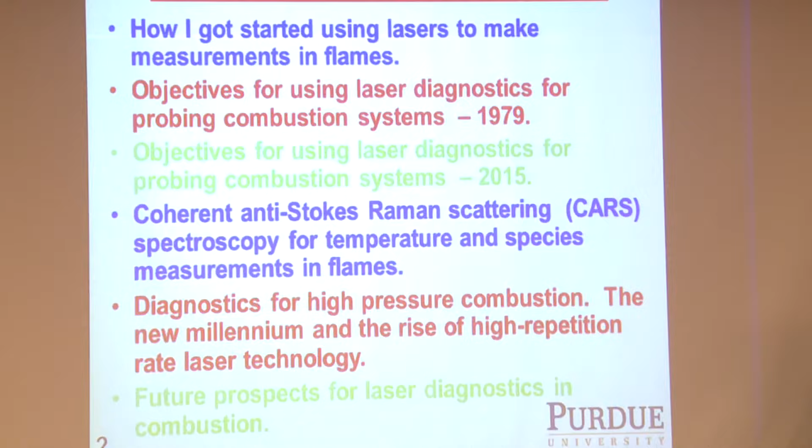So here's the outline of the presentation. I'd like to talk about how I started using lasers for measurements in flames back when I was a graduate student here - I started using lasers for probing combustion systems in 1979. I wanted to compare and contrast what we thought we were doing then with what we think we're doing now, and then talk about two subjects among many.

Femtosecond CARS, which is a diagnostic we're developing - what I call an advanced diagnostic that's not quite ready for application in practical combustion systems. And then I'll talk about some of the things we're doing in systems very close to practical combustion, out at the Zucrow laboratories.

A lot of the things we're doing now have been enabled by the rise of high repetition rate laser technology in the last 10 years especially. And then I'll talk just a little bit, if I have time, about future prospects for laser diagnostics in combustion.

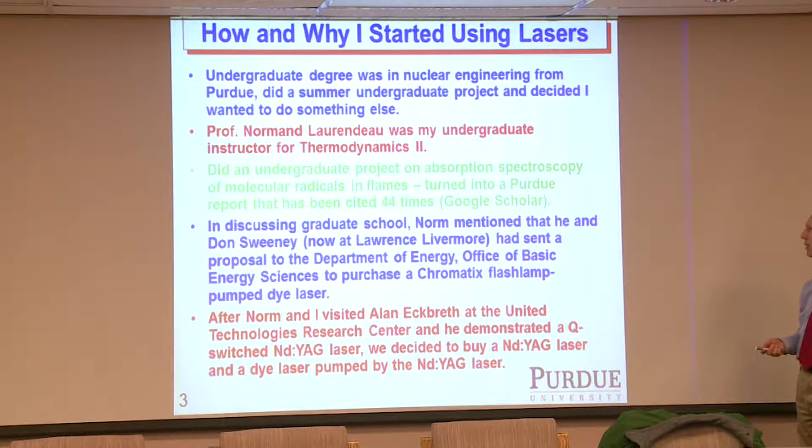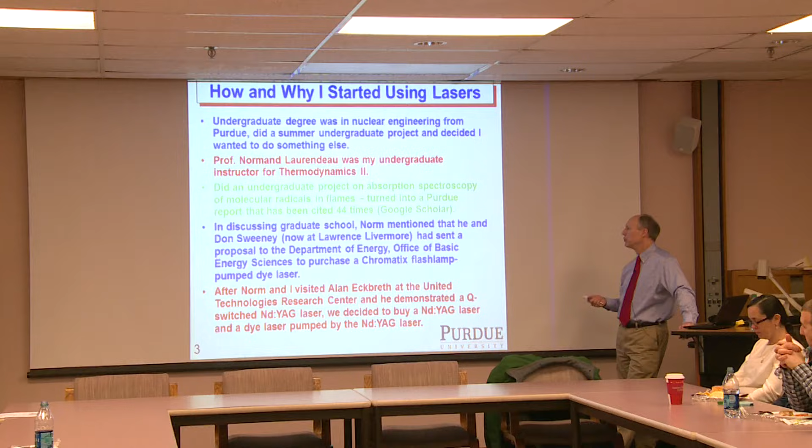So I did an undergraduate project on absorption spectroscopy of molecular radicals in flames, and that's a Purdue report. It's not an archival journal, but that actually got me fairly well known in the combustion community. And it was just at the time when people were starting to think about using lasers to measure properties of flames - temperature, species concentration, and also velocity.

So we were talking about graduate school, and I started working for Norm Laurendeau and Don Sweeney. Norm is deceased - he died a couple of years ago, he got acute leukemia. Don Sweeney is now at Lawrence Livermore. At the time, they were young assistant professors, and they had a proposal into the Department of Energy, Office of Basic Energy Sciences, to buy a laser.

Which was funded. They had proposed to purchase a Chromatix flashlamp-pumped dye laser, which you've probably never heard of because this company went out of business in like 1981. The reason they went out of business was because that was when neodymium YAG lasers and neodymium YAG pumped dye lasers were just coming onto the market.

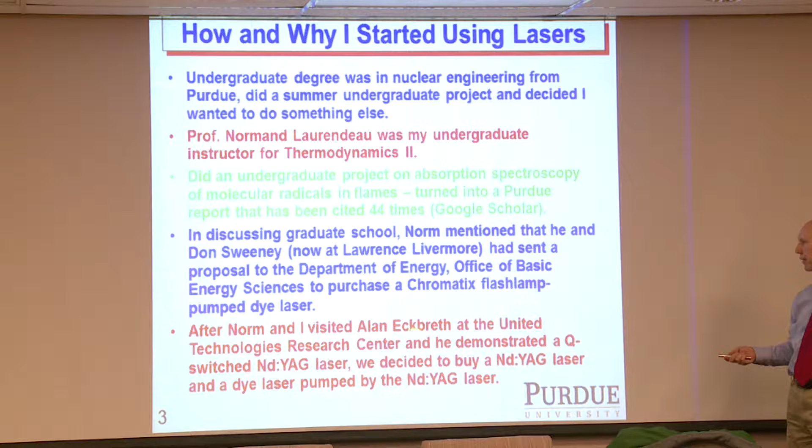So Norm and I went to a meeting at UTRC in East Hartford, Connecticut, and Alan Eckbreth showed us his lab. He'd just gotten one of these Q-switched neodymium YAG lasers, and he held out a lens and demonstrated that you could break down air.

And so Norm decided we needed to buy a YAG laser. He didn't want to get locked into this old technology, and the problem was we only had about half the money, so Norm persuaded the department head, Arthur Lefevre, to give us the rest of the money to buy this neodymium YAG and the dye laser that was pumped by the neodymium YAG laser.

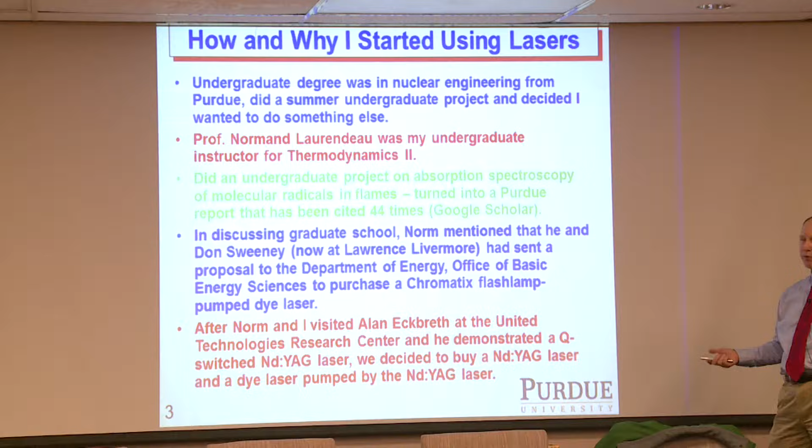And that really set us on a good course because we would have been trapped with obsolete technology just at about the time we had bought the Chromatix laser. So instead we got this new commercial system which kept breaking down, and I kept having to take apart the power supply. It was only when I went to Sandia and took an electrical safety training course that I realized how lucky I had been to survive graduate school.

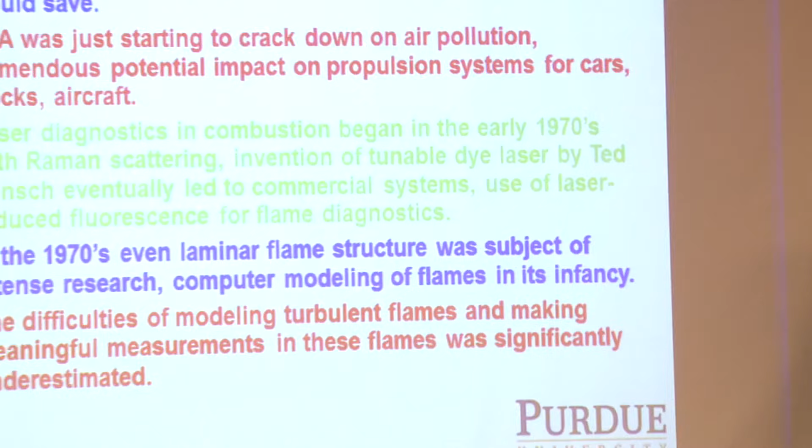So in 1979, there were still a lot of things unknown about combustion, but looking back on it, we've made a tremendous amount of progress over the last however many years that is - over 30 years.

So there was a lot of interest in combustion in 1979 because we had a couple of oil crises. The Department of Energy was new then - it was created by Jimmy Carter, and then it was a campaign target at about this time for Ronald Reagan. But when you sent a proposal into the Department of Energy, you had to indicate how many barrels of oil your proposed research would save.

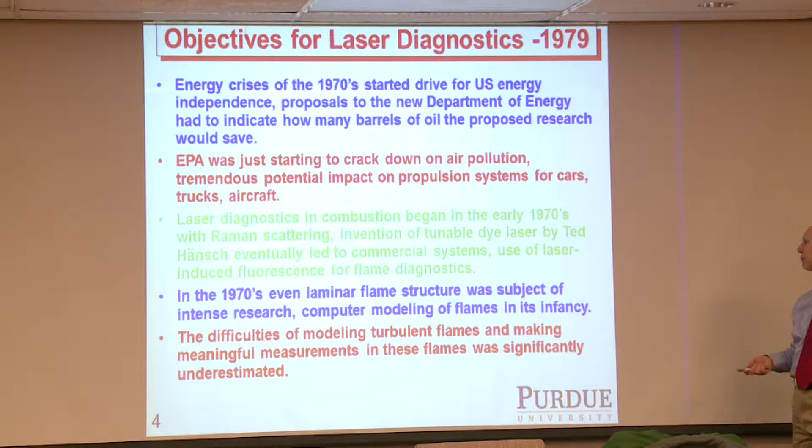So laser diagnostics in combustion began in the early 1970s with Raman scattering - I'll talk about what that is. And then it really got a boost with the invention of the tunable dye laser by Ted Hänsch, who recently got the Nobel Prize for other things, frequency combs and things like that. That led to the use of laser-induced fluorescence for flame diagnostics, which is what I did my PhD on. So in the 1970s, even laminar flame structure was pretty mysterious.

This was before we'd started to use lasers to make measurements in flames, and before people were really using computers to model flames. It's really incredible to look back and see how far we've come.

There were a lot of proposals at that time to go in and make measurements in turbulent flames and figure everything out in 5-10 years or so. It's somewhat like laser fusion in that it's always several years in the future that we're going to figure all these things out.

But we understand a lot more about turbulent combustion than we did back in 1979, and that has had a lot of impact. So now in 2015, we're still very concerned about conserving oil and having efficient combustion systems.

So we have sort of a bridge maybe to renewables because of fracking technology that's developed. We're not worried about running out of natural gas and oil within the next few decades, like 5 years ago everybody predicted that we would be.

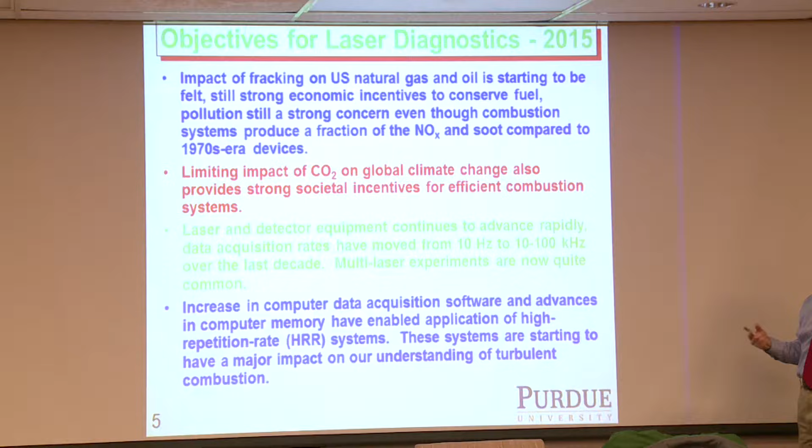But we still kill a lot of people every year, although it's hard to definitely trace it back to air pollution, but we still kill a lot of people because of things like NOx. And soot also is now being implicated in global climate change.

And of course, in combustion, one of the main products of combustion is CO2. So the more efficiently we burn, the less CO2 we produce. So there's still tremendous societal and economic incentives to burn things as efficiently as we can.

Laser and detector equipment continues to advance very rapidly. We were making measurements at 10 hertz for like the first 30 years that I was working in the field, and now we're moving rapidly to 10 to 100 kilohertz systems.

The other thing that we do multi-laser experiments very commonly these days, whereas back when I started, if you could afford to buy a single laser system, you thought you were pretty lucky, and those laser systems had pretty low power.

And so the types of experiments we're doing now, people used to say in papers in the 1970s, if we had another laser system, then we could do these measurements on a single shot. And everybody said, 'Oh, you'll never do that.' But we do that routinely now.

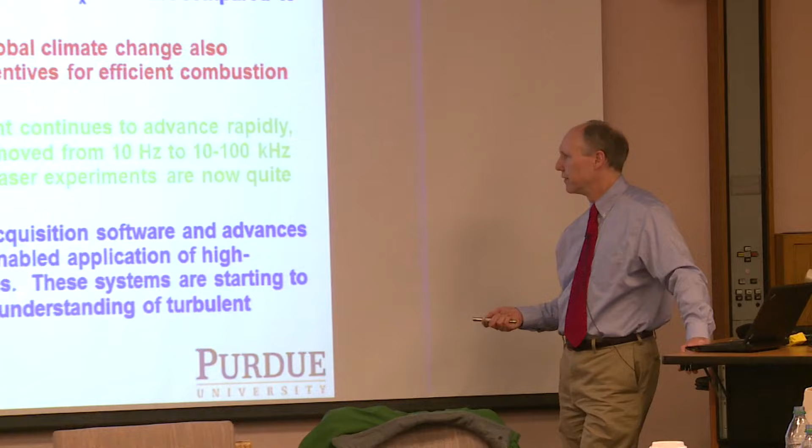The other thing that's really helped our experiments is I took my master's data using a chart recorder, and so now we have computers that allow us to control the experimental systems to take data.

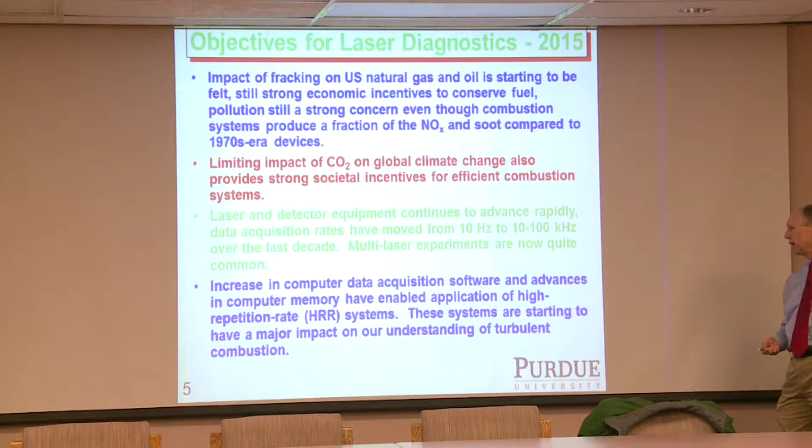Especially out at Zucrow in the combustion lab, we just take a lot of data when we run our gas turbine combustors, pressures and temperatures and everything. And then with these high repetition rate laser systems, a day's worth of data taking results in over a terabyte of data. So it's lucky computer memory has come along and dropped in price so much.

So I thought I'd concentrate on femtosecond CARS, but I thought I'd better say a little bit about what Raman scattering is.

Raman scattering was really developed or discovered experimentally by one of the most famous Indian physicists in history, Raman. He got the Nobel Prize in physics. In Raman scattering, a laser beam at a certain frequency goes in, interacts with the molecule, and the molecule doesn't really absorb the photon, but it scatters it instantaneously, and the molecule goes from a ground state to an excited state if you have Stokes scattering.

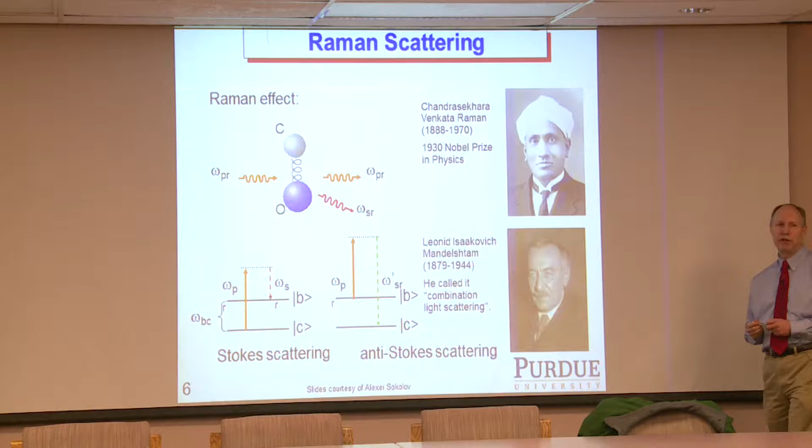And you can see a little bit of light that comes off of the molecule. It's a very weak process, but that light is coming off as a shifted frequency, and the shifted frequency it comes off at depends on the molecule. Because it's instantaneous, the intensity doesn't depend on the collisional environment for the molecule.

So it's a really great technique, and this was the technique that people were looking at. A number of groups, as soon as the invention of the laser came about in the 1960s and 1970s, people started to apply Raman diagnostics in the gas phase.

And people tried to apply it in heavily sooting practical combustion systems, because every flame that was practical in the 1970s was pretty much heavily sooting because of the way the combustion systems were configured.

The problem is that this is an extremely weak process. Rayleigh scattering, which is scattering at the same frequency and is the reason the sky is blue, is thousands of times stronger than Raman scattering. So as soon as people tried to apply this to flames that weren't really clean, that had hydrocarbon fragments or soot, the signal was swamped by interferences.

Alan Eckbreath, who was showing us that laser, was developing CARS at that time. He said if the Raman scattering cross-section was 100 times greater than it is in nature, we wouldn't be dealing with any other sorts of laser diagnostics. But it isn't.

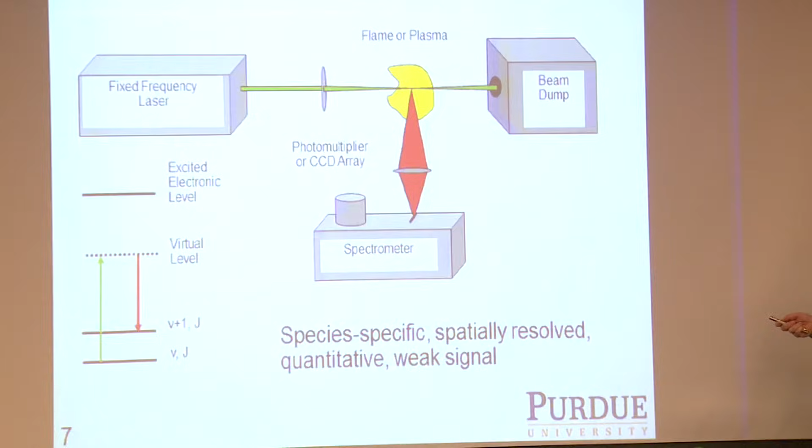So here's a simple diagram for the Raman scattering process, where a laser is focused into a flame, and we collect light from as small a probe volume as we possibly can, because we want to see what's going on at a particular point in the flame. That light is collected, imaged, dispersed with a spectrometer, and detected with a CCD array or a photomultiplier tube.

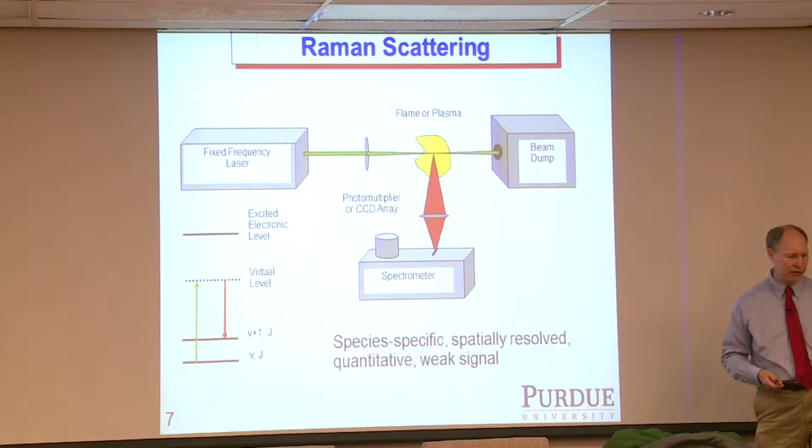The green laser beam goes in, and red light is scattered at the Raman shifted frequency. The frequency of this red light depends on the molecules present in the flow at that point, and the intensity of that light depends on the temperature and density of the flow. So you can get a lot of information if you can detect the signal above the background, and that's the problem. So CARS was developed.

CARS was first demonstrated by Maker and Terhune at Ford Motor Company.

Another difference between research these days and research back in the 1960s was that in the 1960s and 1970s there were a number of industrial labs, like Bell Labs, Ford, GM, General Electric, that had a lot of people, and Bell Labs just did lots of fundamental basic science. They don't do very much of that anymore. Everything is sort of funded by the business units. Andy, you were at Bell Labs, right? A place called Bellcore. Bell Labs split up.

Anyway, they discovered CARS, actually I think in crystals. The name CARS, Coherent Anti-Stokes Raman Scattering, was assigned 10 years later by a group at Stanford University under Bob Byer. It was first used as a gas phase diagnostic by Jean-Pierre Taran at ONERA in France in 1973, who detected hydrogen with it, which is a great Raman scatterer.

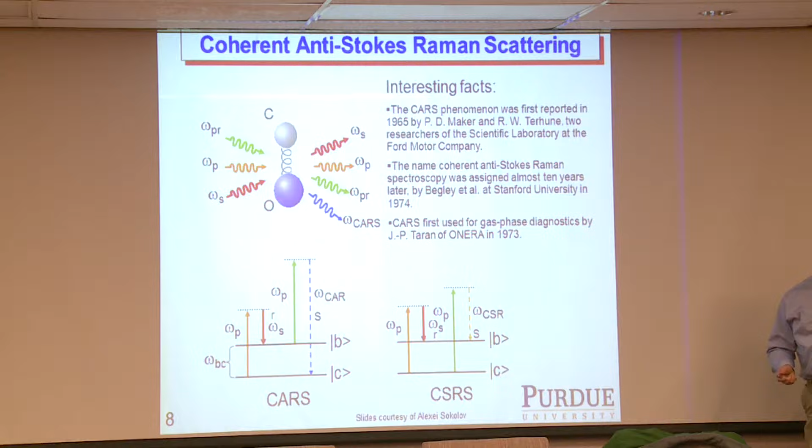In CARS we have a pump beam and a Stokes beam, and three laser beams coming in total. The pump beam and the Stokes beam create a Raman resonance in the medium, and then that resonance scatters the probe beam, with the CARS signal coming off shifted into the blue. The advantage of CARS for combustion diagnostics is that we have three beams coming in and the signal comes out at a different frequency, which is good.

The species selectivity comes in because we only get a significant signal when the pump beam and the Stokes beam are tuned to a Raman resonance of the molecule. In this case, 2,330 wave numbers is the molecular vibration frequency of nitrogen.

Because in this process we have to conserve both photon momentum and photon energy, the signal comes off as a laser beam. So in this process we destroy, in this case, a green photon and a yellow photon, and we create a red photon and a blue photon.

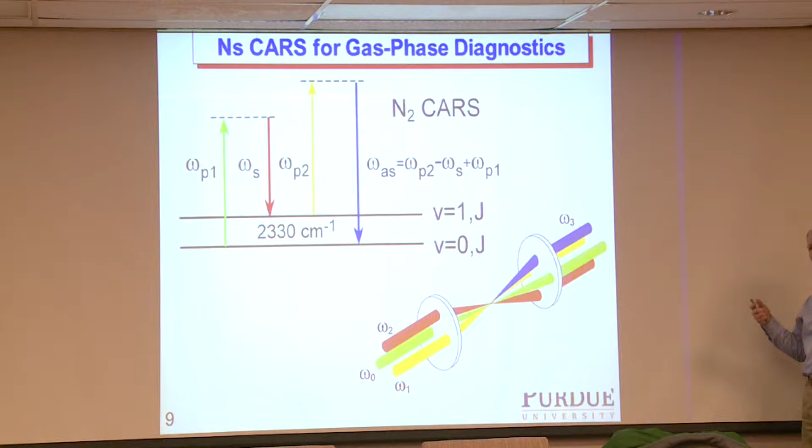I don't have the phase matching diagram here, but you can only get a CARS signal in a particular direction at a particular frequency. That means you can take this signal beam coming out as a laser, focus it into a pinhole, and really discriminate against emission from even very harsh sooting flames.

Now, we want to make these measurements on a single laser shot. The way we do that is we send in three beams. Two of those beams, the pump beam and the probe beam, will have very narrow frequencies, and the third laser beam will be a broadband dye laser.

I'm being very kind to the spectrum here, actually it's incredibly noisy spectrally. In that case, we can detect all of the transitions of the nitrogen molecule at once.

This is the fundamental vibrational band, and the little lines you see here are the rotational transitions under that vibrational band. This is what the spectrum looks like at 500 Kelvin, and this is what it looks like at 2000 Kelvin. So from the shape of the spectrum, we can determine the temperature in the flow at the point where the beams have crossed.

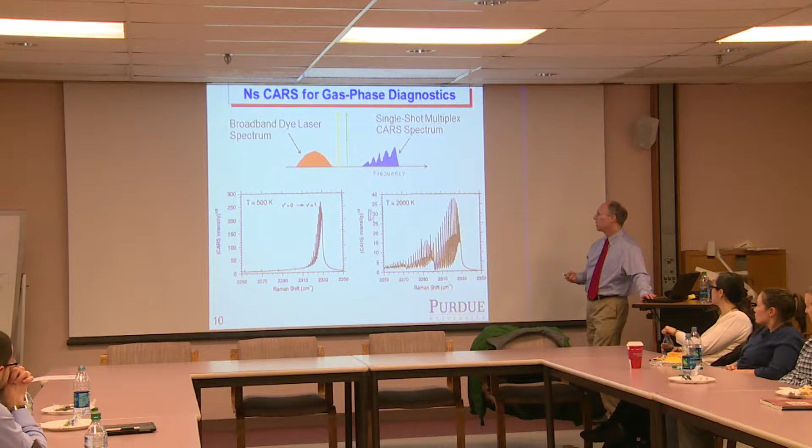We only get the CARS signal when the beams cross, and so that gives us a spatially resolved measurement. Also, because the beams are 10 nanoseconds, we get time resolution. So this is what a CARS experiment looks like.

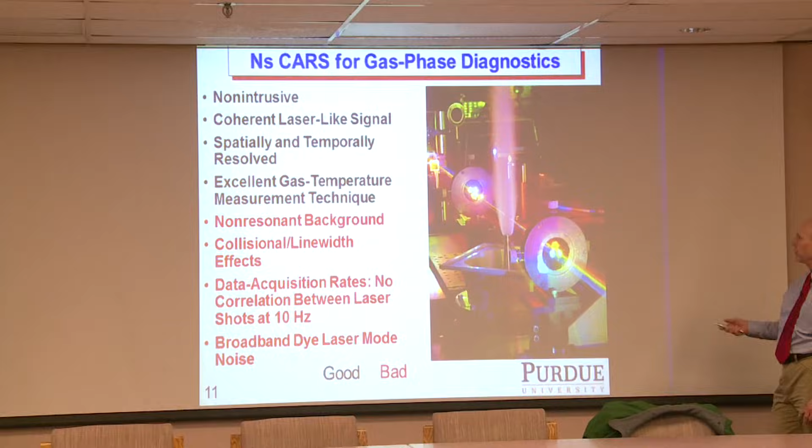This is a flame system we still have set up in our laboratory, a hydrogen jet diffusion flame. It's a simple laboratory flame, or fairly simple as turbulent flames get, that we use to test our diagnostic techniques. What I show here is a technique we call triple pump CARS. We have 4 laser beams focused to a point, and then the signal comes off. Unfortunately, you can't see the signal because it's at such low intensity, at least for nanosecond CARS. For femtosecond CARS, we can actually see it.

CARS is an excellent temperature measurement technique. It's non-intrusive - that was a word in the title slide. That means the laser beam is going through, and it doesn't really affect the flame like if you put a physical probe, like a thermocouple, in there. If you put a thermocouple in there, the gas molecules would have to flow around it. So the laser does not perturb the flame.

The signal comes out as a laser beam in CARS, with spatial and temporal resolution. So CARS is the best temperature measurement technique we have in combustion, the most widely applied, although it's complicated physically, so there are not that many groups in the world that actually do it.

There are a number of problems in applying the technique: non-resonant background, collisional line width. The one I'll talk about is that these laser systems operate at 10 hertz, so there's no correlation between the laser shots in a turbulent flame. By the time you have another laser shot, the flame has changed completely. And the broadband dye laser gives you a tremendous amount of noise on the signal.

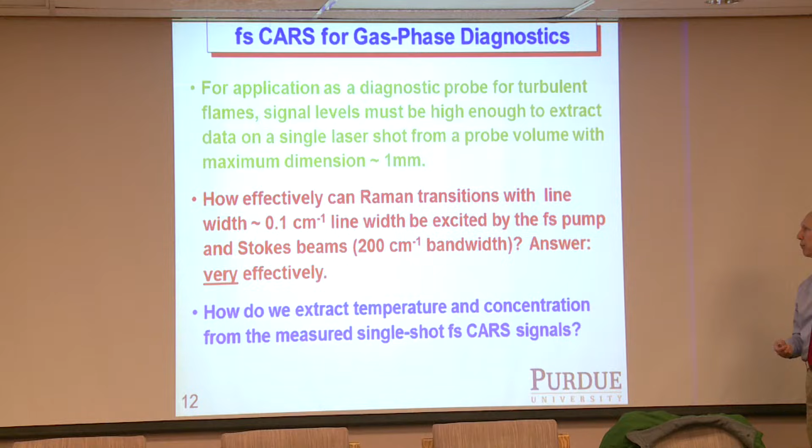So to address a lot of those problems, I thought about trying to use femtosecond lasers in the early 2000s. I was at a Gordon conference listening to a talk by a physical chemist from Heidelberg, I think. He had been using CARS to make time-averaged measurements of flame temperature, which wasn't that interesting to me because you really wanted to make single shot measurements in flames to get at turbulent statistics and things like that.

So I figured you'd never really be able to apply ultrafast lasers to do CARS in flames because the spectrum of an ultrafast laser is just so big. An ultrafast laser system with a, say, 100 femtosecond pulse width is 200 wave numbers wide. Our Raman transitions are, at atmospheric pressure, about 0.1 wave numbers wide. So I was half listening to this person, and then I realized that the Raman transition is a two-photon process, and so actually we can excite Raman transitions extremely effectively with these ultrafast laser systems.

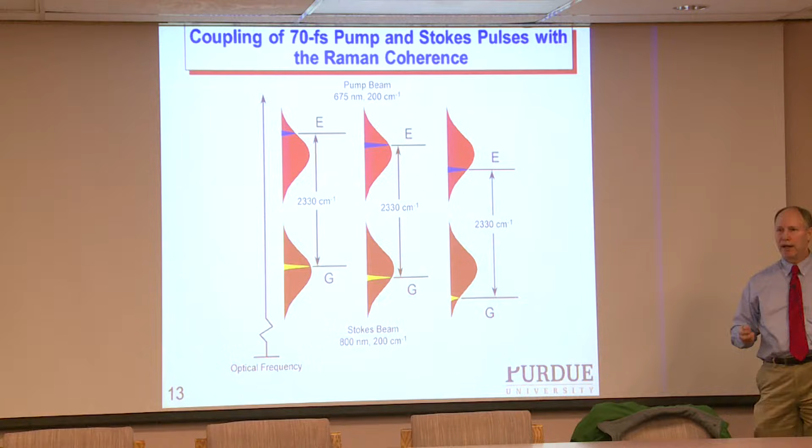Then the question is how we can extract temperature and concentration. I won't go into all of that, but here's why we can couple very efficiently with even very narrow resonances. Say we have a resonant line at 2,330 wave numbers that's very narrow - we can pick out a frequency pair here, our Stokes beam and our pump beam for the ultrafast laser system, and use that to excite the transition. But there's another frequency pair that can excite it here, and another here. So basically the entire bandwidth of the ultrafast laser system can be used to excite a single transition very efficiently, and all these frequency pairs contribute coherently to that excitation because the ultrafast laser is actually a single mode laser and has the same phase across that spectrum.

And so the other thing we had to do was determine how we could actually make single shot measurements.

This is a theoretical calculation. We can create a giant Raman coherence in the medium at t=0 by the interaction of ultrafast pump and Stokes beams. Not only do they excite single transitions very effectively, they excite all of the transitions we're interested in with the same efficiency, pretty much, for a molecule like nitrogen. So at time 0, we get a giant Raman coherence in the medium.

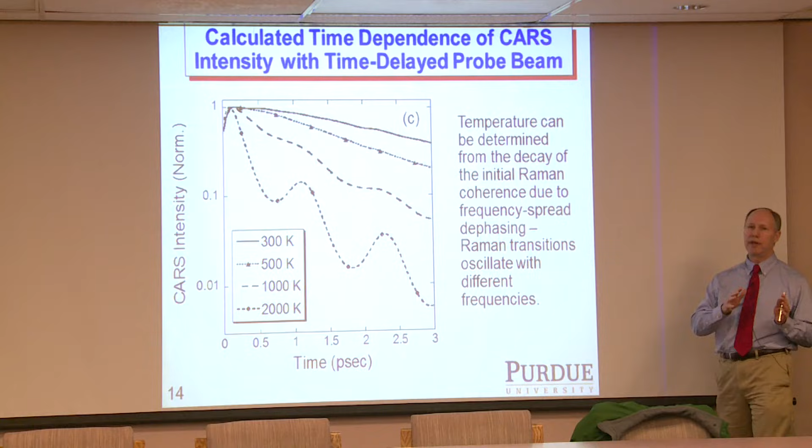That Raman coherence then decays, not because the molecules are colliding, but within a few picoseconds. The collisional frequencies in a flame are about 100 picoseconds or so. It decays because all of those Raman transitions, excited by the ultrafast pump and Stokes pulse, initially have the same phase, but then they start to oscillate with their transition resonant frequencies, and those frequencies are all a little bit different, so they start to oscillate out of phase.

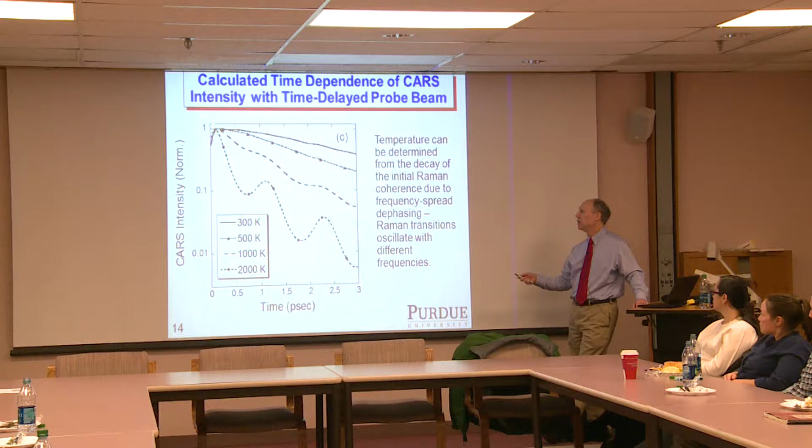At low temperature, they pretty much all have the same frequency, so it takes a long time for them to oscillate out of phase and for the coherence to decay. At high temperature, though, we have a very large frequency spread of transitions, so they decay very rapidly. Here you can see some beating coming in because we're exciting more than one vibrational mode of the molecule in this case.

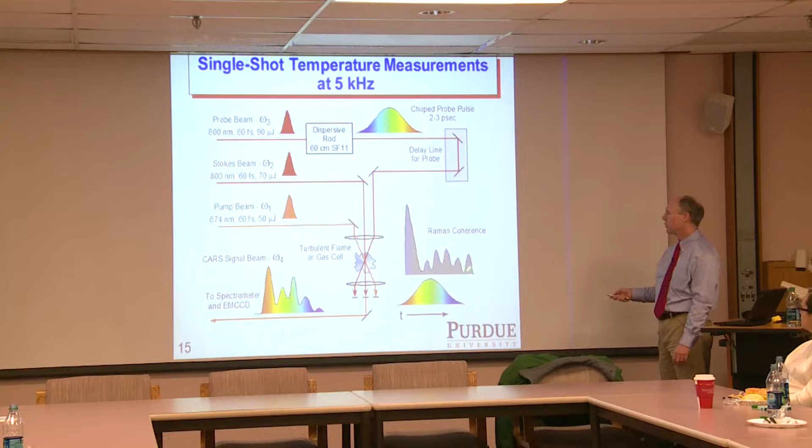I could say a lot more about that, but the other thing we had to figure out was how to map the decay of that Raman coherence into the spectrum of the CARS signal beam. We do that by sending the probe beam through a rod. We have this nice 60 femtosecond laser beam that we've spent over $500,000 on the technology to produce this pulse at 60 femtoseconds.

Then we send it through this rod of glass and disperse those frequencies so that the red frequencies come out first and the blue frequencies come out last. The Stokes beam and the pump beam are nearly Fourier transform limited, so we cross those in the flame. Then we probe the Raman coherence with this chirped probe pulse, and we map the decay of the coherence into the spectrum of our CARS signal beam.

The nice thing about femtosecond CARS is that if we take data in a very stable flame, we can get a very, very narrow instrument function. In a turbulent flame, we have vast fluctuations in temperature, so in the pseudo-laminar flame we were developing the technique in, we're measuring pretty much always the same temperature, 1592 plus or minus 10 Kelvin in this case.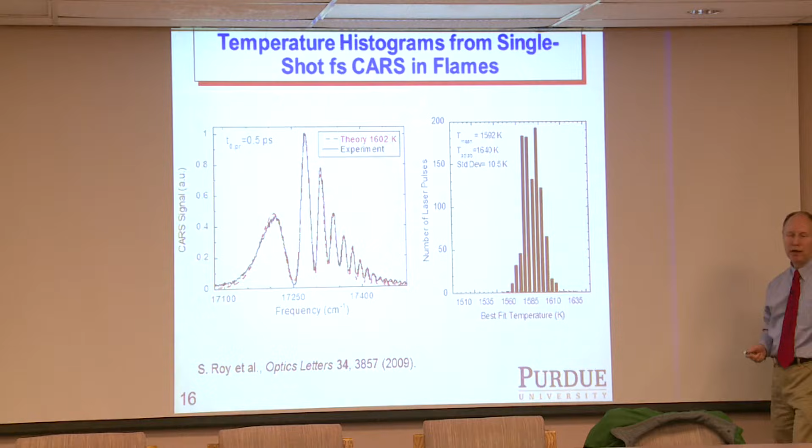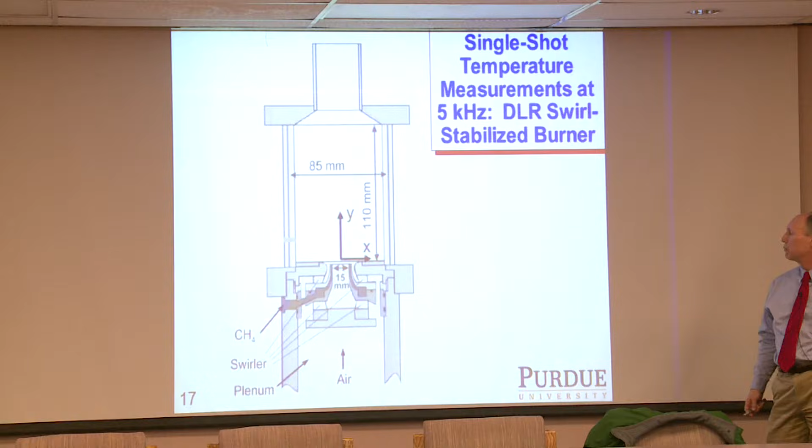We had been developing this technique for quite a few years, so we decided to try some measurements with researchers from DLR Stuttgart in a swirl stabilized burner. Claresta Dennis and Carson Slabaugh are in the audience here. So this is the burner in operation.

You can hear it a little bit here. You can barely hear yourself think in the lab when this flame is on. In fact, one day I'd forgotten my key card for the lab, and I tried to get in, but they couldn't hear me.

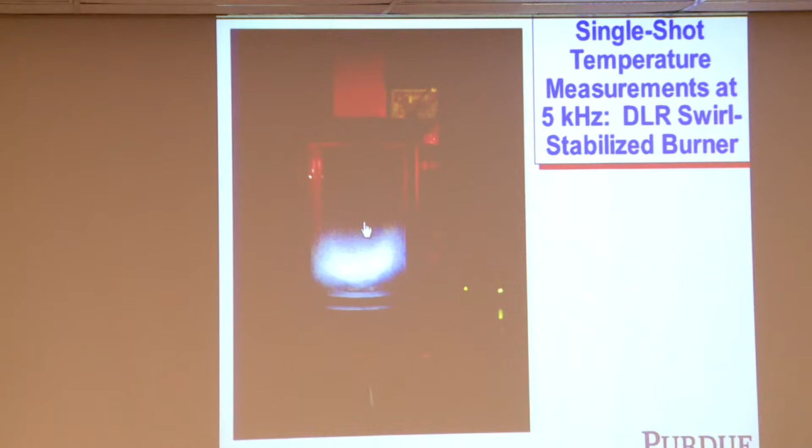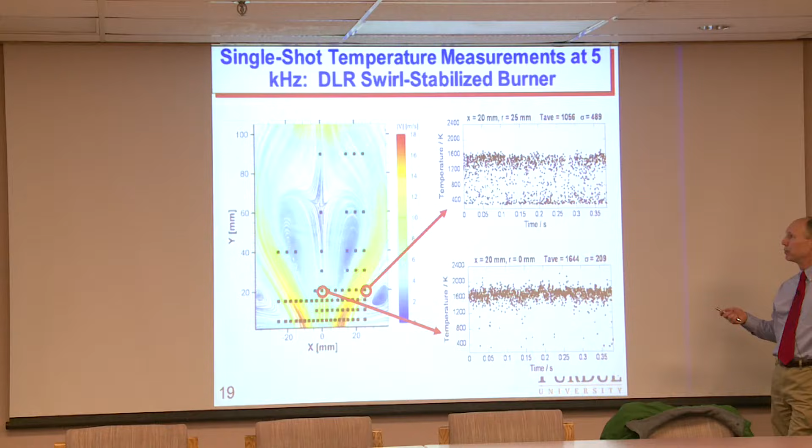Despite the very, very high levels of turbulence in that burner, we were able to make temperature measurements on almost every laser shot.

Here's a velocity field diagram of that flame. Here we have a recirculation zone point where we expect the temperature to be pretty much stable, and that's what we observe. Then here we are in the shear layer where the fuel and air are mixing, so we have the shear layer moving back and forth with lots of turbulent interaction going on, and there we see a much greater spread of temperature measurements.

We're continuing to work on this technique, and eventually we'll want to apply it in high pressure turbulent combustion.

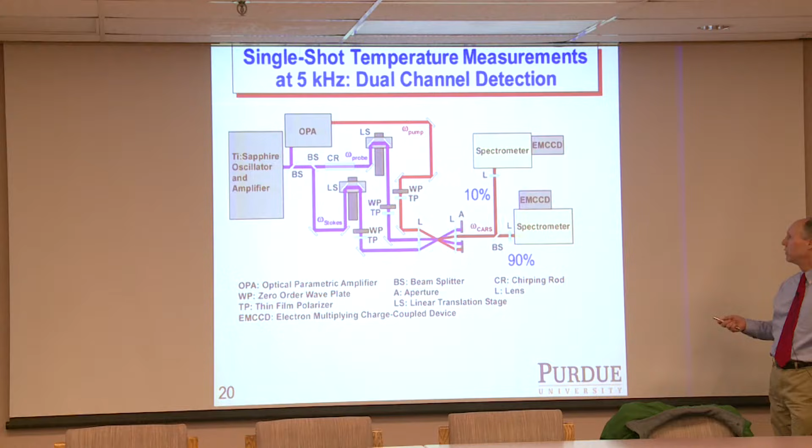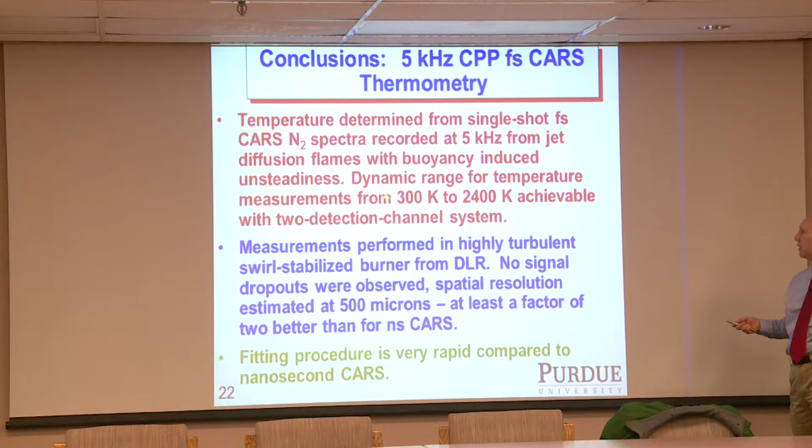We've done things like use a dual detection system to increase the dynamic range, so I'll skip over that. But we're able to make measurements at 5 kilohertz in these turbulent flames. One of the challenges we face is that the temperature in the flame can go from 300 K to 2400 K, and the signal level drops by a factor of 1,000 when that happens.

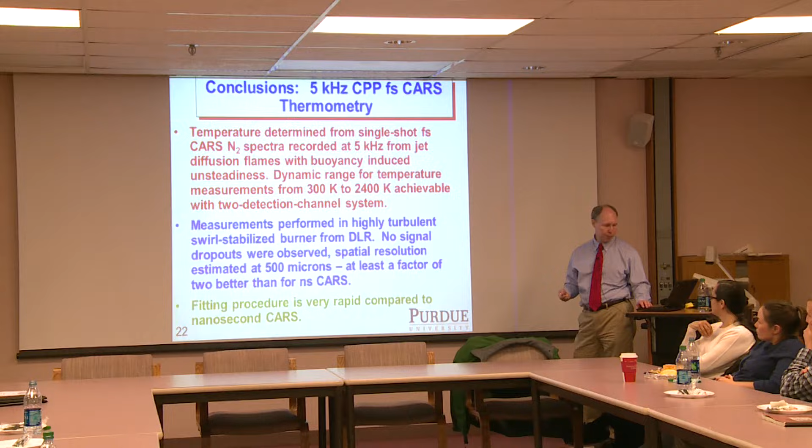The measurements were performed in this highly turbulent swirl stabilized flame from DLR Stuttgart. They wanted to learn how to use femtosecond CARS, and we wanted to learn how to do high speed particle image velocimetry. So that's what I'll turn to now.

I'll talk about our measurements in high pressure combustors. These are measurements we're making out of the Zucrow laboratory. Eventually we want to apply things like femtosecond CARS in these systems, but I'll talk about the measurements we're making now. In particular, I'll be concentrating on the aviation gas turbine testing or experiments that we're doing.

Why do we want to make measurements in high pressure combustion systems? We're trying to help the gas turbine industry in this country. These systems are very complex. The combustion changes considerably as the pressure increases, so you can't do atmospheric pressure measurements and figure out what's going on in these high pressure systems.

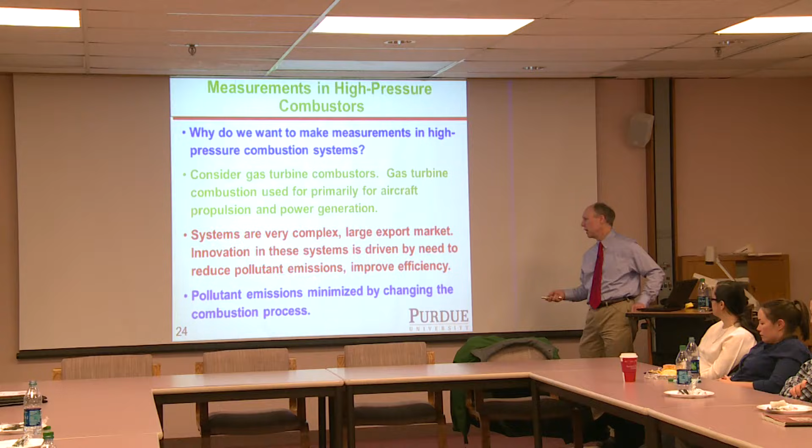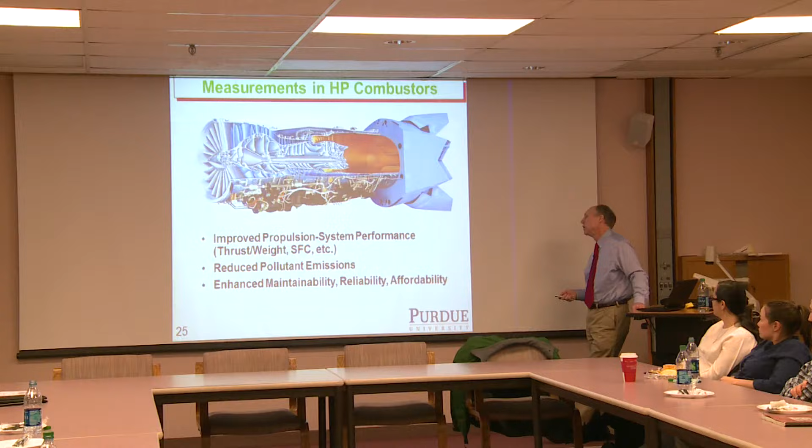Gas turbines are still something the US makes that the rest of the world wants to buy. A lot of the research in at least civil aviation is directed at trying to get very low pollutant emissions. This is actually a military gas turbine, the engine for the F-22, and so the combustor is right here.

It's kind of hard to see. The volume that the combustor actually occupies for the whole engine is surprisingly small, but there's tremendous energy release in that combustion zone due to the very high turbulence levels, and that's what keeps the airplanes in the air. All of this is the compressor, and then there's a little bit of a turbine here in this aircraft engine.

And then here is the afterburner. So for not so much for military, but for aviation gas turbines, what we want to do is minimize the amount of pollution that we produce from burning the fuel in the air here.

The compressor produces high pressure air that's heated to a very high temperature also. The fuel is sprayed in, and it used to be that the fuel was sprayed in with a nozzle that would mix the fuel very far from the nozzle. So there would be lots of regions where you would have too much fuel for all the air to burn, and that would produce a lot of smoke and nitric oxide.

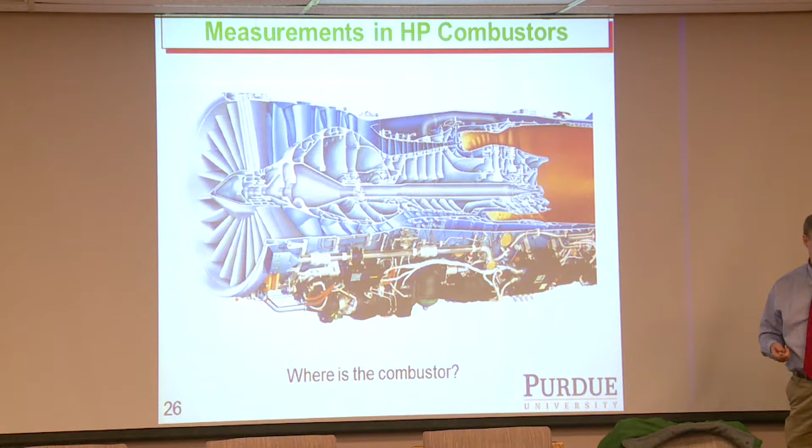Now the approach is to try to burn as lean as you possibly can, to try to premix the fuel and air before the combustion process starts. That way you avoid creating soot because you don't have too much fuel for the air to burn. You also decrease the nitric oxide because it doesn't really form if you can keep the temperature below 1800 Kelvin or so.

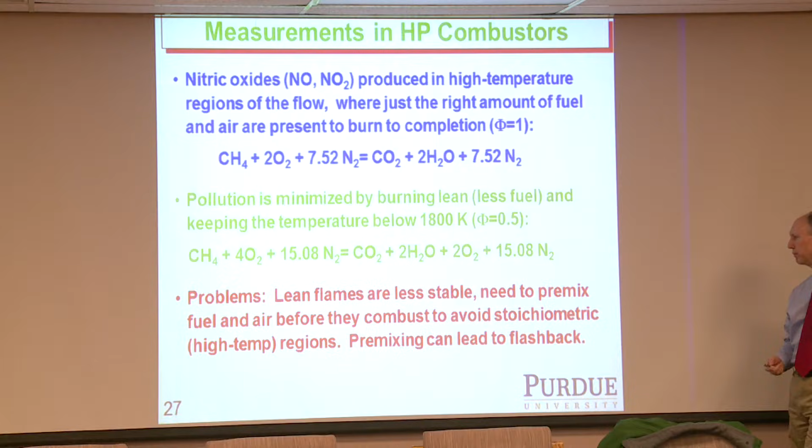Now the problem is, as you try to burn leaner and leaner, the flame becomes less stable. You have combustion instabilities, and you have to be very careful about how you do it, because if you just premix the fuel and air, it would flash back and start burning up your aviation hardware.

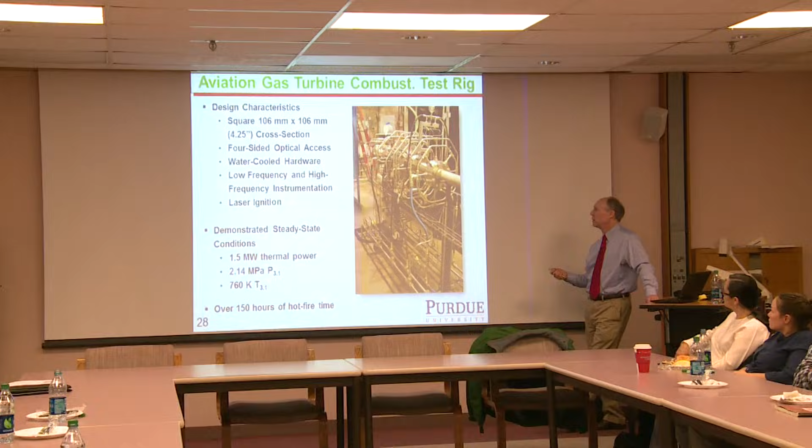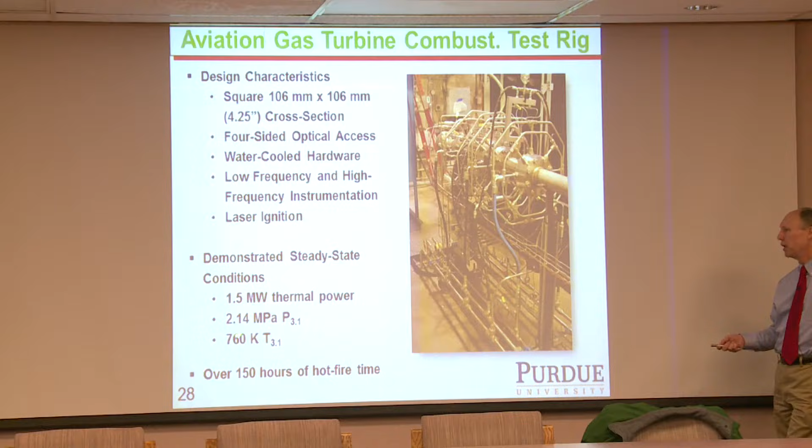So we have an aviation gas turbine combustion test rig that we've been developing out at Zucrow. It really started under 21st Century funding and then NASA funding. About 4 years ago, General Electric Aviation started to fund us to look at their advanced lean premix pre-vaporized injector, which we're not supposed to say the name of. This is a test rig that Carson Slabaugh and others have been working on, and we've demonstrated operation at 1.5 megawatts of thermal energy release in about a liter volume, at pressures above 20 bars and with inlet temperatures up to 760 Kelvin. That'll be going up in the near future.

So this is a video of...

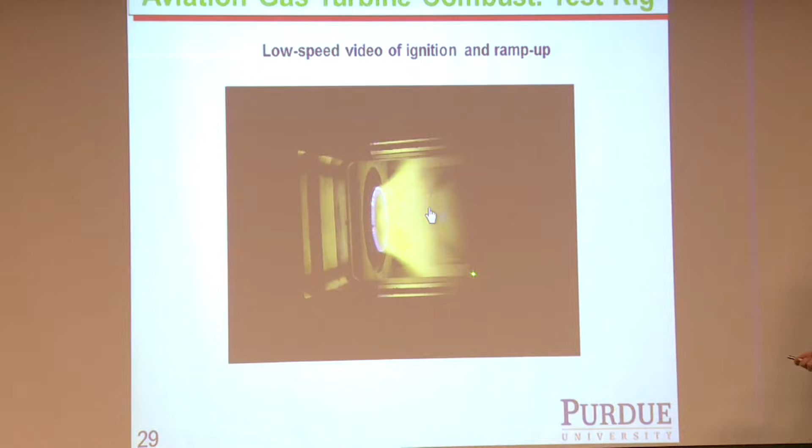We use a laser to ignite the flame—that's the little flashing you saw there. The reason we do that is we use a lot of nitrogen to film cool the windows. It used to be that we had a spark plug in one of the windows, which we replaced with metal. We had to flow a lot of fuel to get the stoichiometric mixture right at that spark plug, and we also had to turn the nitrogen off. So once the flame was ignited, it was a panic to get it turned down before we burned up the test rig. Laser ignition really helps us in terms of rig safety.

So I'll show that one more time. The flow is coming in—this is the main flow, and there's actually no fuel coming in the main. This is called a heat shield, that's what's turning purple and heating up. So this is all pilot fuel at the moment, and it's a very, very clean burning flame—you don't see a lot of soot there. It looks very blue in the laboratory because it's being premixed and leaned out before the combustion starts, so we don't produce soot that coats the windows at all in this burner.

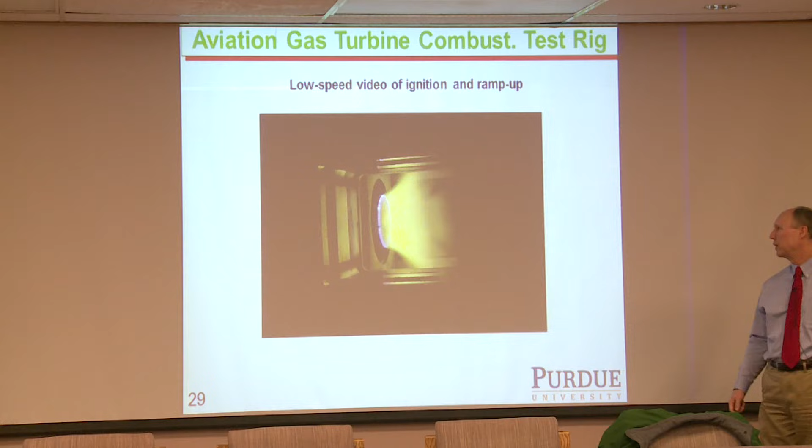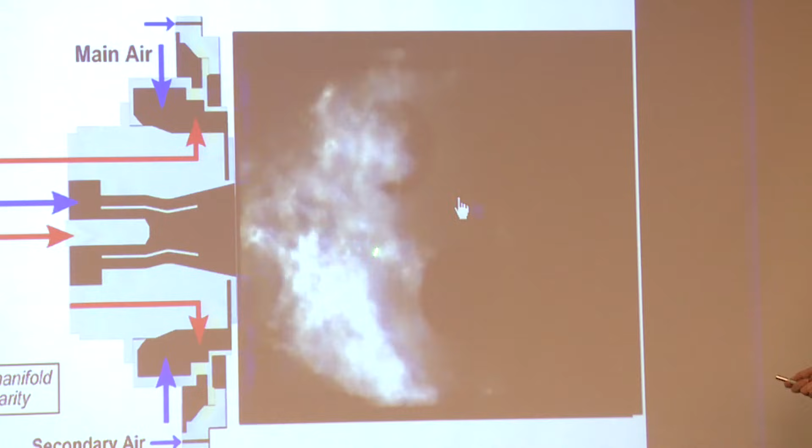That was a low-speed video, which surprisingly the people at GE really like to look at—that was just a GoPro video. This next one is a video produced of the combustion zone by a high-speed camera operating at 5 kilohertz. The flame looks really steady with the GoPro camera, but actually there are a tremendous amount of dynamics going on. In particular, the flow is coming in and recirculating back, the fuel is coming in, recirculating back and burning in what's called the recirculation bubble. That's what we're most interested in looking at for General Electric.

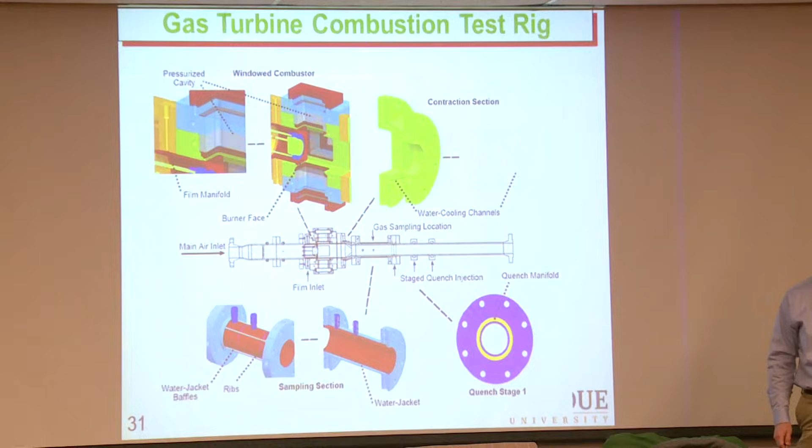So this is a little bit on the design. Carson Slabaugh was the principal person working on the design here, and Scott Meyer, who's also here, was also involved in that early process where we spent about 6 months talking about this design with GE. One of the reasons our windows survive so well is we use high pressure nitrogen to flow over the window—we have a lot of nitrogen out at Zucrow, and that was an idea Carson had. So we get a nice film cooling of that window, and it survives even though a lot of times we think the flame is impacting actually right on the window.

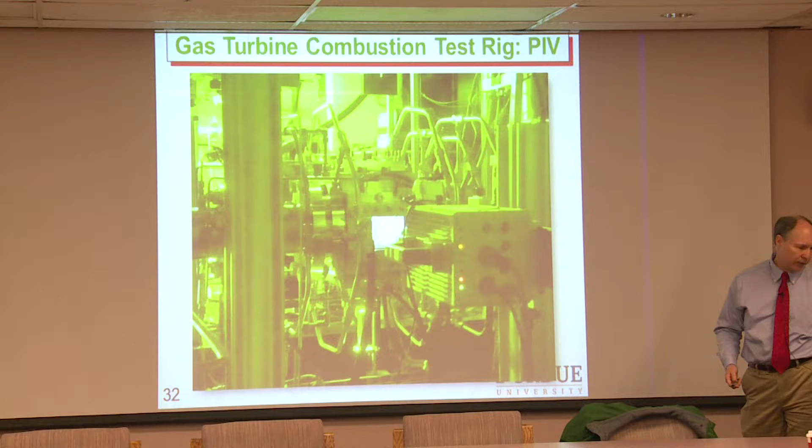Here's a photograph of the system in operation, and it looks completely green here because we're using a green laser to do particle imaging velocimetry in the system. The green laser we're using is called the PIV laser—it's a dual head system that puts out a beam at 532 nanometers in the green, and it really gives us some spectacular pictures.

The way we operate is we form a laser sheet. The beam comes out, and we use cylindrical lenses to focus it in one dimension and spread it out and collimate it in another dimension. So we get a sheet of light coming through the chamber, and the PIV laser puts out two laser pulses that are very close in time. We seed titanium dioxide particles into the flow, then look at the scattering with the PIV camera from those particles, and see how they move from one image to the next. From that, we're able to determine the velocity in the flow.

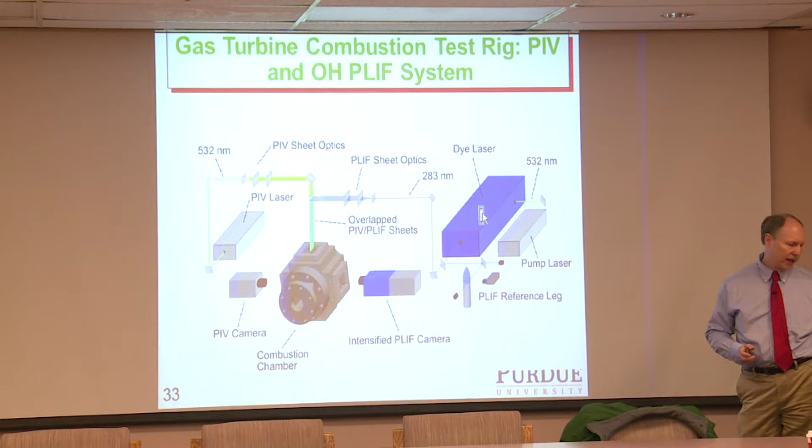We also use another laser, and this one doesn't give us very good pictures at all because it's a 283 nanometer beam that we can't see. But this beam is tuned to a resonance of the OH molecule, and that tells us where the flame is burning. So from the PIV measurements, we seed particles in and take two very rapid snapshots, which tells us what the flow velocity is in this plane. Then the PLIF sheet is overlapped, and that tells us where the flame is burning in this sheet.

We're trying to look at the influence of the velocity field on the reaction fronts. So here is scattering from those particles—this is a PIV image when we don't have any liquid fuel injection. We take two of these images like this, spaced by about 8 microseconds or so, depending on what we think the flow velocity is.

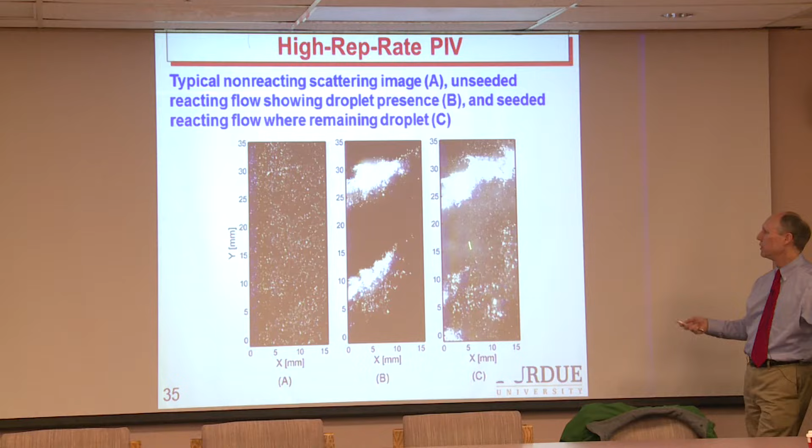And then we can track the particles using sophisticated algorithms and determine what the velocity is at a point in the flow. In these high-pressure liquid-fueled systems, we have a lot of fuel droplets coming in. So this is a picture with no PIV seed, and here's a picture with the droplets and the PIV seed. We have to figure out how to discriminate against the liquid droplets, or maybe use that information.

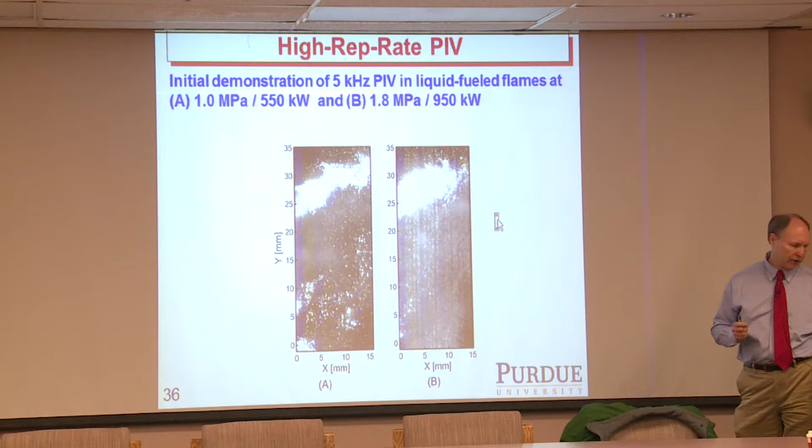The other thing that happens as we go to higher and higher pressure and thermal heat release is we start to get blurring in the images. So we're fighting a lot of those issues as we go to higher and higher pressure, but we've learned how to deal with a number of them.

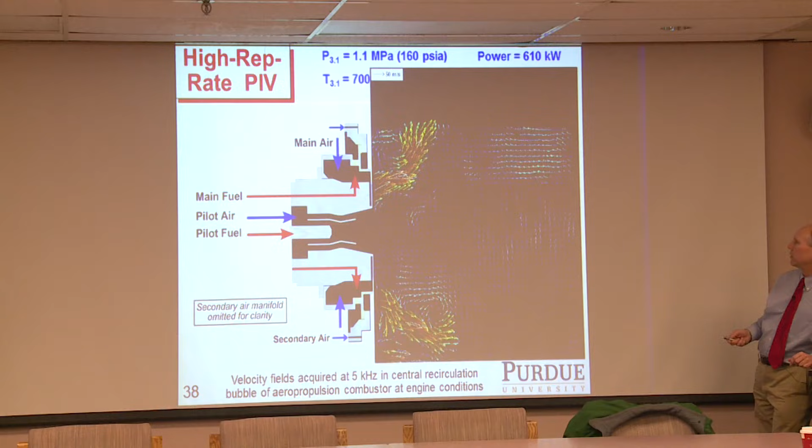So we have a wide dynamic range of velocities in this flow that we have to be able to handle with our particle imaging velocimetry measurements. If you saw that, you could see a significant vortical structure - the flow has some vortical structure in here. We see a lot of interesting things looking at these measurements.

So we combine that with the OH-PLIF. All of these measurements are made possible by the introduction of diode-pumped solid-state lasers, commercially available for a little less than a decade now.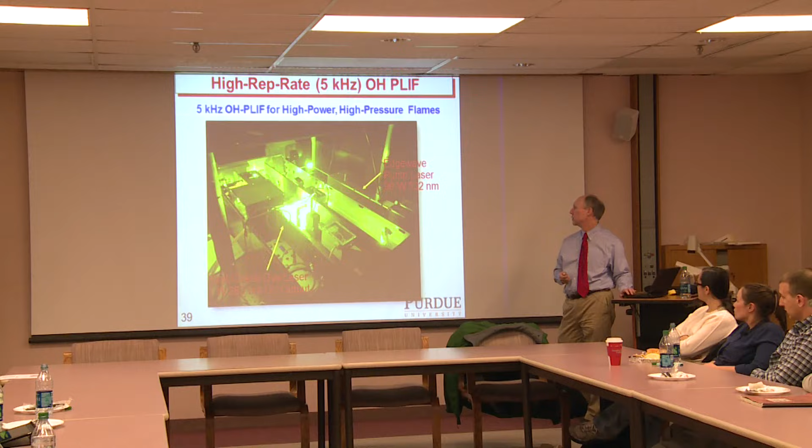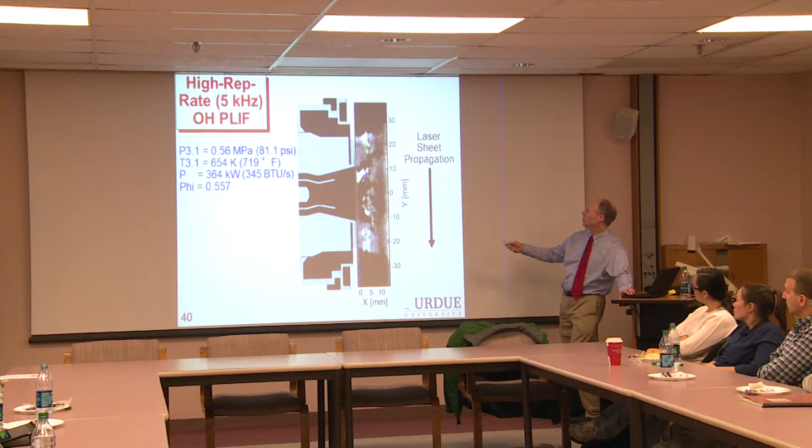So we do the same thing with the OH-PLIF. Here's a laser sheet coming in, and here it's a grayscale image, so the high intensity regions are where we have a lot of OH. You can see here we don't have reaction, and here we have reaction. This is the pilot region, and here we have a region where the pilot and the main are reacting, are interacting. Then here we have the heat shield region, which is a region of interest where we're getting reactants right on that heat shield - I'll just skip over how we process the images here.

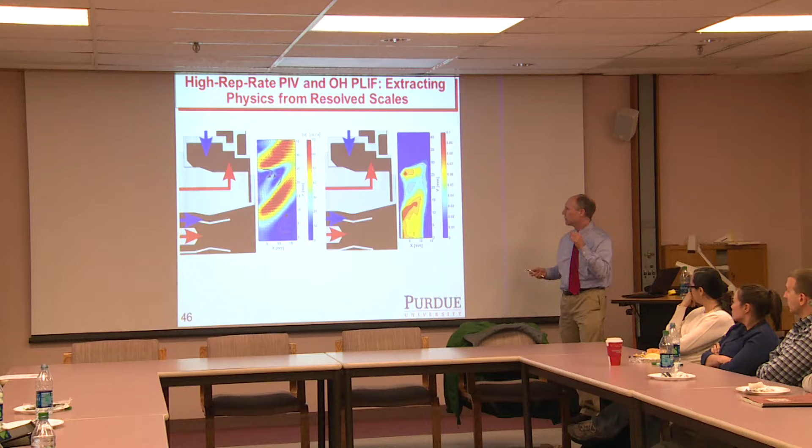So here is the time-averaged flow field, where we take those instantaneous measurements and get the time average flow field, and we can see some structure here in the heat shield region, where we have some recirculation zones. Then if we look at the OH-PLIF measurements, we actually get a significant amount of flame surface density right here at the edge of the heat shield. We get a lot of reaction here also. Most of the main fuel goes out with the airflow here and then comes back and recirculates and burns in the recirculation bubble.

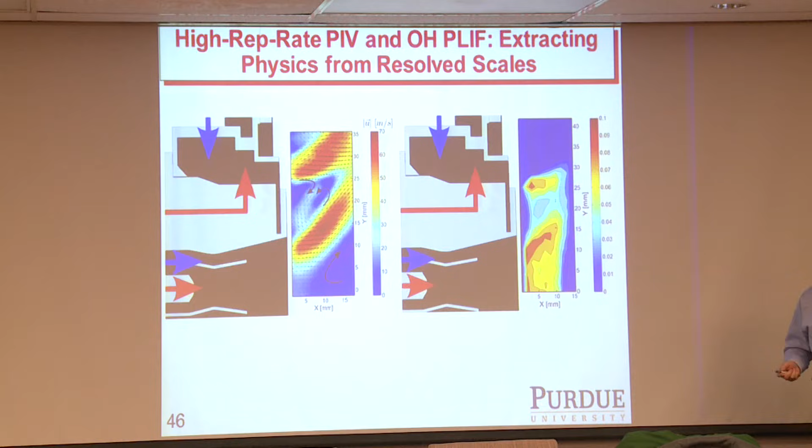So we were operating - I shouldn't say we, Carson and Andrew Pratt, and I believe some other people were operating the test rig one weekend trying to get up to 300 PSI, and they called me. I was at the movie theater, and they said, we cracked the heat shield. And I thought, oh, that sounds bad. So we talked to General Electric, and that turned out to be a common failure mode for this particular injector. They were actually quite interested in that, and just said, oh, just keep monitoring it. So we continued to operate for many years with that cracked heat shield.

But now with the PLIF and PIV, we can see why we got that cracked heat shield. We've developed this test rig, and over the last 4 or 5 years, we've really demonstrated how to have windows survive and make measurements both in this test rig and in other test rigs that we have for power generating gas turbines. So we can make measurements up to 17 bars now that we've demonstrated. General Electric wants us to go up to 40 bars.

And we've developed a lot of analysis tools for extracting quantitative information from the measurements.

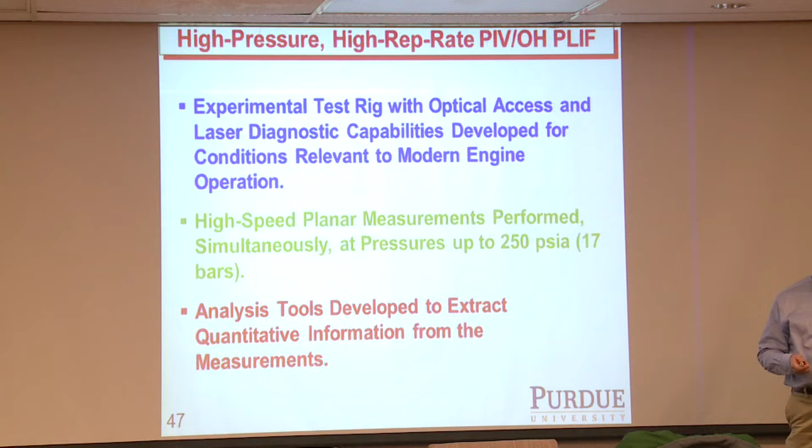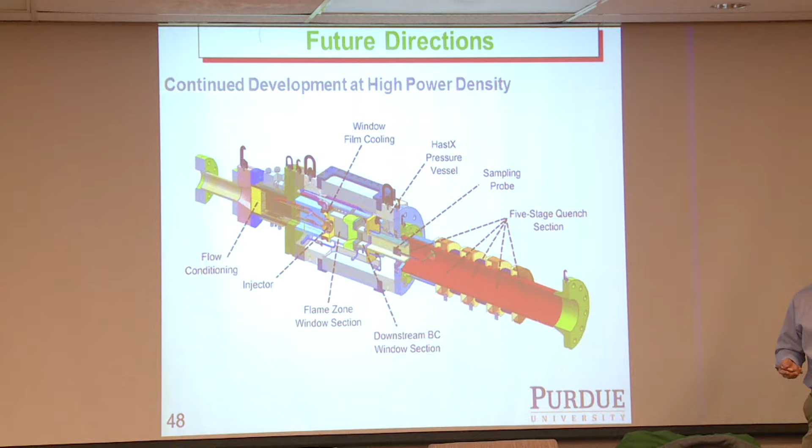So what we did with that test rig, like I said, General Electric wants us to go up to 40 bar. This is the test rig we designed last year and is being fabricated right now. It's all Hastelloy, and it turned out to be a lot more expensive than we had anticipated. It's a lot bigger. These windows are 3.5 inches thick, so this is basically 2 feet in diameter. With this test rig we'll go to even higher thermal energy release rates, and we'll go to 40 bar. It's being fabricated, and in the next couple of months we're going to have to put it together and run it.

Other things the group has been working on: the flows we're looking at are highly swirled, so we really want to get at that third component of velocity. Right now we're doing planar measurements, but we're only getting the velocity in the plane of the laser sheet. If we have a couple of cameras looking at that laser sheet at angles, we can use triangulation to get the third component of velocity. This is something people do pretty routinely in atmospheric pressure flames and flow systems where you don't have windows to deal with.

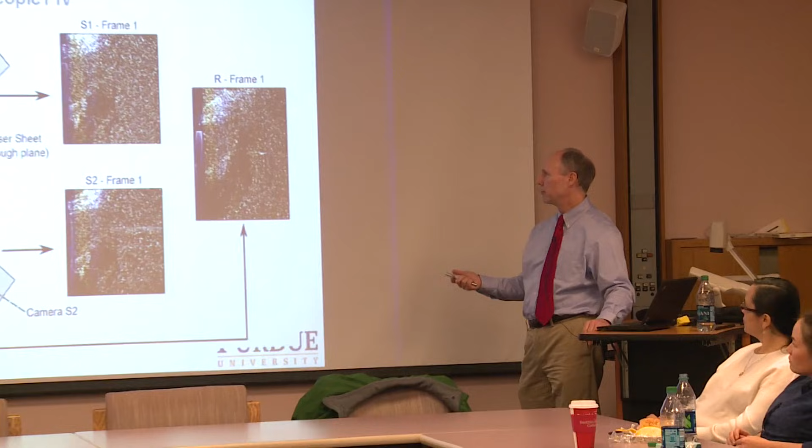But Carson went to DLR Stuttgart last year to learn how to do stereo PIV in high pressure flame systems, and now we're doing that out in our test rig at Zucrow. These are some images from the stereoscopic cameras and a reference camera. There are a lot of sophisticated algorithms we're using to try to reduce error in these measurements. Carson and Pavlos Vlachos are working closely on algorithm development, or at least we're consulting with Pavlos to make sure we're getting the most accurate measurements we can for the velocity field.

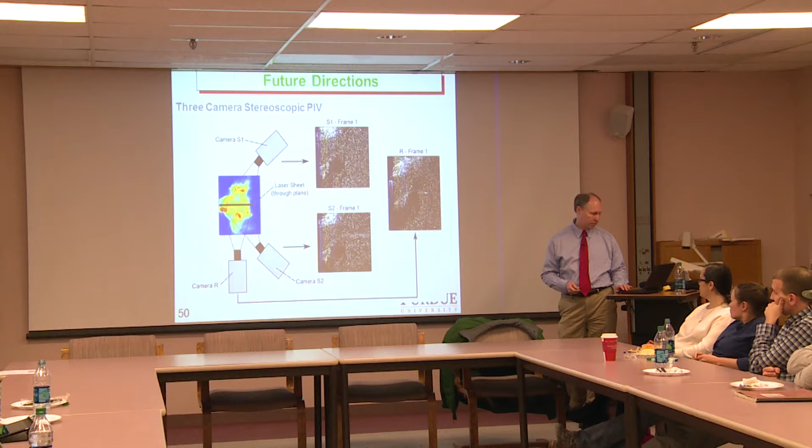As soon as we started taking measurements at 10 kilohertz, we realized - and it was really kind of depressing when we took measurements at 5 kilohertz - there's actually very little correlation between the images when we're in this very turbulent, highly swirled flow. So we really want to move towards 50 kilohertz, and there are a couple of ways of doing that.

We have ordered and now delivered a 150 watt Edgewave pump laser that can go up to 40 kilohertz. Sarah Eisert is doing measurements with Kevin Cho on propellant combustion. We got this laser after Steve Son and I wrote a proposal to AFOSR to do propellant research.

The cameras have to be able to take data at that higher rate, and the cameras we're working with now max out at about 5 kilohertz for full resolution. Our cameras are 3 or 4 years old, so we need to get more state-of-the-art cameras, since they continue to go to higher and higher frame rates with more and more pixels.

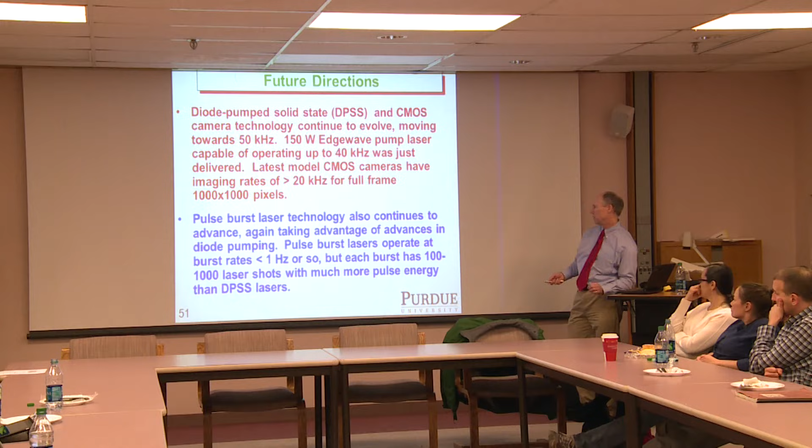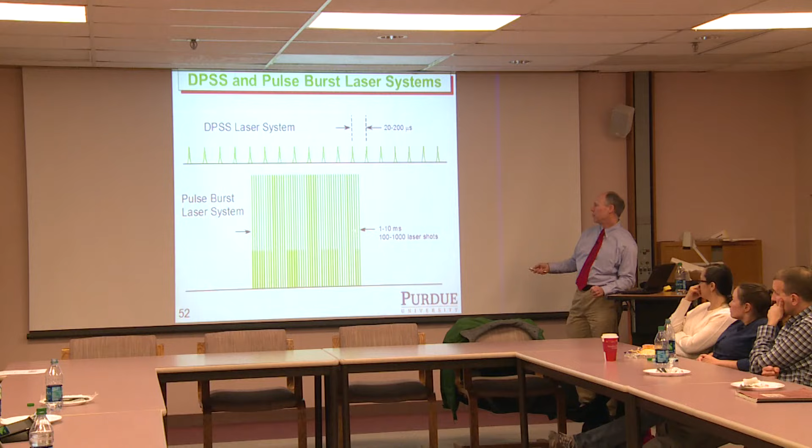The other thing we're doing is buying a pulse burst laser that'll allow us to get to over 100 kilohertz. These lasers operate at overall repetition rates of much less than a hertz, but every time they fire they produce a burst of pulses lasting from 1 to 10 milliseconds, so we can get 100 to 1,000 laser shots at frequencies of, say, 100 kilohertz up to 1 megahertz. This is what our DPSS laser systems are doing right now, with pulse spacing of 20 to 200 microseconds, and those keep lasing as long as we keep the systems on. But with the pulse burst laser system, we can zero in and make very high repetition rate measurements at a particular time in the flow, and hopefully our flow is statistically steady enough that our statistics will converge over, say, 1 to 10 milliseconds. That's not evident that that is the case.

We also want to extend the femtosecond CARS from a point measurement to a line measurement, and we can do that by focusing our beams, instead of with a spherical lens that focuses them to a point, focusing them to a line.

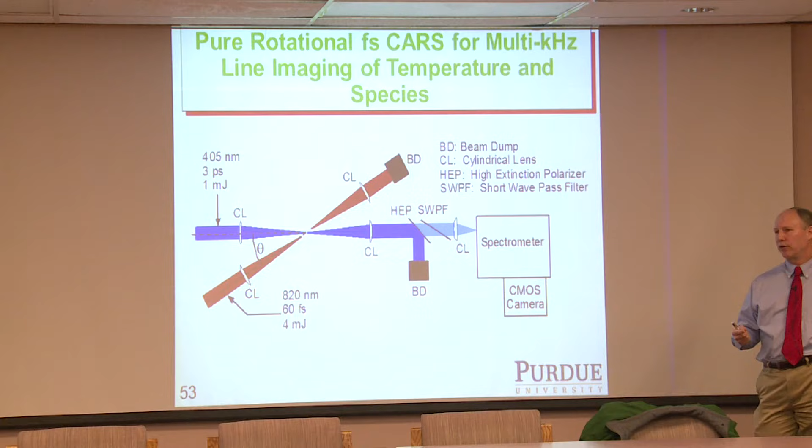Clare Dennis is actually back from China Lake this week, mostly struggling with the laser, but this is the experiment we're trying to do at the moment, using 2 beams, a pure rotational CARS experiment. What we would like to be able to do is take line images and make temperature measurements along a line in our gas turbine flow at data rates of 5 to 10 kilohertz.

So to do that, we actually need a new building, which was just fully funded. Out at Zucrow, our laser lab right now is about 150 square feet, and it has a window air conditioner in it. So the ultra-fast laser system wouldn't even lase in that type of a room.

There was an announcement in mid-February, and I'd like to thank all the people that were involved: Steve Heister and Anil Bajaj, Tom Shih, the dean, up through the president, who were involved in getting funding for this building in place.

So we'll have a building with 5 test cells now, each as big as the test cell we have right now, which has about 5 test rigs in it.

So the graduate students I hire now have to be pretty much contortionists in order to work in that test cell. So we'll have 5 test cells, and then a 2,000 square foot laser laboratory that runs along the length of the test cells.

And that laser lab will be suitable for running things like the ultra-fast laser system. So we'll have combustion test rigs in there, and there will be a turbine heat transfer test rig in there. I think almost as soon as this building opens, we'll probably fill up those test cells.

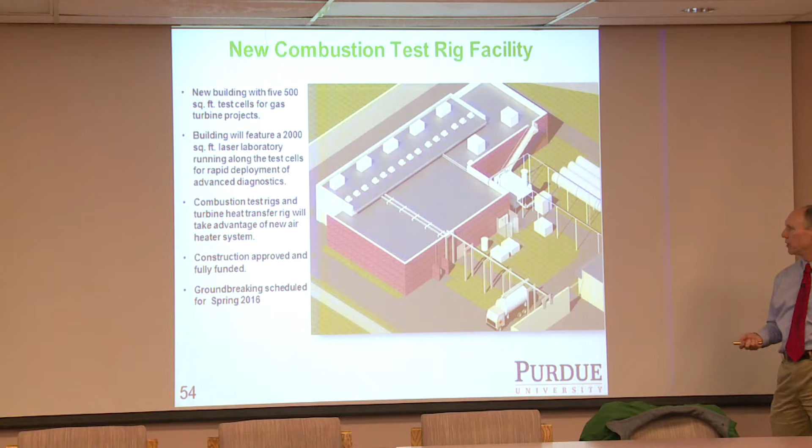Groundbreaking is now scheduled for the spring of 2016. And we are putting in a new air heater, which will allow us to go to 1,500 degrees Fahrenheit instead of the present 1,000 degrees Fahrenheit.

And this is something General Electric really wants. The modern compressors for aviation gas turbines have very high pressure ratios, and so the gas coming out of the compressor going into the combustor is at about 1,500 Fahrenheit. And I know Rolls-Royce is talking about even higher temperatures.

Our current air heater, which is probably 40 years old at least, Scott Meyer knows for sure, is about 1,000 degrees Fahrenheit. This new one will also have much better control, and it has 850 psi maximum operating pressure. This was funded by the OVPR, and it's about a $2 million air heater.

Scott Meyer, and then the people who have funded the work out at Zucrow, starting with the Indiana 21st Century Fund, and then leading on to working with GE Aviation, Siemens, and Rolls-Royce. And one thing about working with industry is, as they said in Ghostbusters, they expect results. So it can be pretty high pressure.

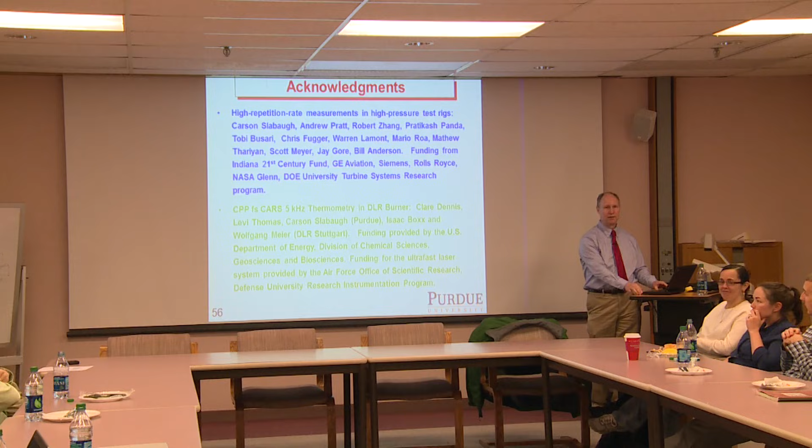Bob, when you're saying for the gas turbine combustor, the pressure will go from 17 bar to about 40 bar. And for laser diagnostics, especially high frequency PIV and PLIF, what would be the challenges when you go to 40 bar?

Oh, well, the main challenge will be that as you go to 40 bar, especially in the combustion zone, the refractive index gradients are going to be very severe. So we can really see that in the images I showed there. I think we're at 17 bar or close to it. So the particles start to blur.

And so that's something that Carson and Pavlos are very, very interested in, I think. I can say that. So it's going to have to be dealt with via algorithms, and maybe making measurements with multiple cameras so that you have a better estimate of where that particle actually is on each laser shot.

Now, luckily, they're interested, at least at first, not in the combustion zone, but downstream of the combustion zone, where the refractive index gradients are going to be much less severe.